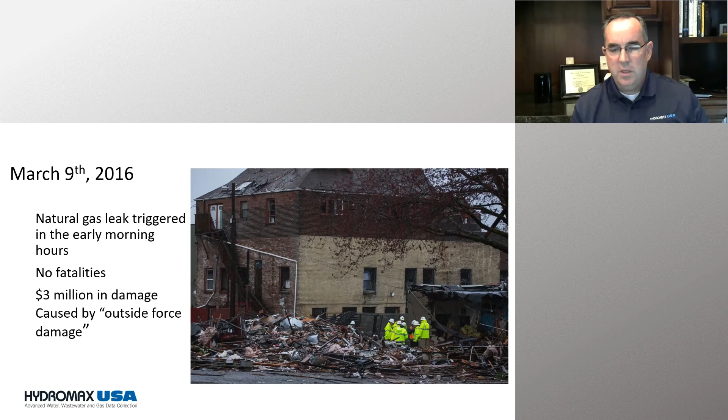For example, if you ever went to a business and saw a gas meter outside with concrete and steel poles around it, every now and then you'll see one where a large vehicle bumped into that concrete pole and knocked it over, and it hasn't been replaced. That makes that meter susceptible to some type of outside force damage, which was the case here. It wasn't because of one of those concrete pylons - it was something else. There was a homeless encampment around this gas infrastructure that caused the problem. Again, no fatalities, not even really any injuries, but a lot of property damage.

So what are the compliance requirements? There are a couple of agencies to be aware of. One is called PHMSA - the Pipeline and Hazardous Materials Safety Administration - and they write the CFR, the Code of Federal Regulations. This regulation, 49 CFR, talks about requirements that any natural gas utility has to meet. Whether you're a large investor-owned utility, a private utility, or a small municipal or even a co-op with 15 gas meters, there are requirements you have to meet for inspection.

You have to proactively go out and look for leaks. It's not enough to wait for a business owner, a resident, or a constituent to call you and have what's known as an odor call. That's not enough. For example, Washington state regulations require that you go out and proactively investigate and look at your infrastructure to make sure that you're not causing any issues.

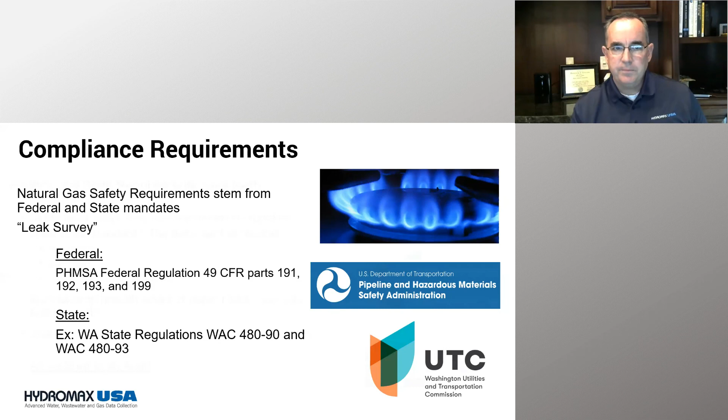And these regulations have teeth in them. You can be fined, a lot, millions and millions of dollars. Besides the damage that has to be repaired, you can just be straight up fined if you're not meeting the requirements. They're very specific, and you need to know what those standards are.

Every gas utility is aware of those standards. For a large utility, there's entire departments dedicated to making sure that those standards are met. So what is that standard? Well, it's broken down into residential areas, business areas, and high occupancy structures is another one.

When we look at the document of record, what is a document of record? Well, for years and years, it's been a paper plat map, and I'm going to show you an example of that here in just a minute. We're going to talk a lot about paper. Because you have these requirements that the utility has to meet, you have to make sure that when asked, you can actually provide those documents. And so there are literally boxes and boxes of paper that have to be rummaged through when that happens.

So you have the obligation to prove that you did the inspection on a certain interval. Residences need to be looked at once every 3 years. Businesses are once a year. If you're a high occupancy structure, which is generally defined as at any point given a day, are there 25 or more people in that area? And if the answer is yes, you can be designated as an HOS, a high occupancy structure. And if you do, then you need to have a leak survey done every 6 months.

In the city of Seattle, when the tunnel boring machine was going underneath Seattle to dig the tunnel that replaced the Alaskan Way Viaduct, it was not every 3 years, or every year, or every 6 months. It was every single day. Prior to, all during, and following that tunnel boring machine working, we did a leak survey over the tunnel boring area every single day. Christmas, your birthday, snowing, rain, Easter, it didn't matter. Every single day, we had to do those investigations.

It's not if, it's just when. And when the auditor comes in, they're going to ask some very specific questions that you have to be able to answer. So during those audits, there's lots of areas that you have to look at.

In general, what you need to do is have someone carrying a methane detection device, something that will sense the presence of natural gas, and walk over the top of where your distribution mains and distribution service lines are. So let's talk about residences. If you live in a neighborhood and enter it, and it leads up to a cul-de-sac, somewhere on that street there will be a distribution main that runs, and off of that main will be a service line going up to each home. So every 3 years, you've got to walk above those to make sure they're not leaking. You've got to go to the actual meter, take a look at it, and make sure it's in functioning order, not leaking. You have to make sure there's no atmospheric corrosion or other kinds of issues.

And so there's lots of obstacles that happen. In this image to the right here, you can see the technician with all his equipment going up and over a fence with a ladder. Cannot get in, which is actually known as a CGI. In some cases, it's a CGA, for 'can't gain access,' but a CGI or CGA means I can't get to the meter.

So what might prevent you from getting to a meter? Well, it could be a lock gate, a fence, or someone stacked plywood over it because they're doing a remodel. It could be because they have a Doberman or some other dog in the backyard and you can't get in there. All kinds of reasons why you can't complete that house.

You have to look at the high occupancy areas and high occupancy structures. You have to look at atmospheric corrosion to see if there's any corrosion on that meter. In a really dry area, it's going to be small. If you're in a high salt content environment, like on a coastal town, it could be really different.

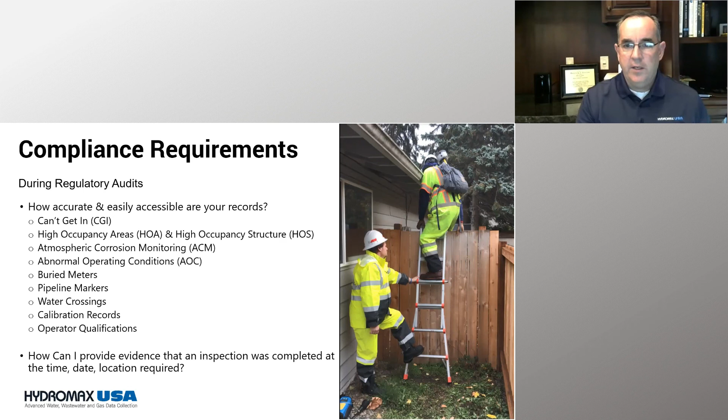So these maps are literally passed back and forth to the field. They're generated by the utility, given to the service provider, in this case Hydromax. We then distribute them out to the world to get the inspection done. And then as the individual walks up this particular street, as they finish that and walk up to the house, they literally pull out a Sharpie highlighter and highlight it, and that is the indication that they're done. This then becomes the document of record that is kept.

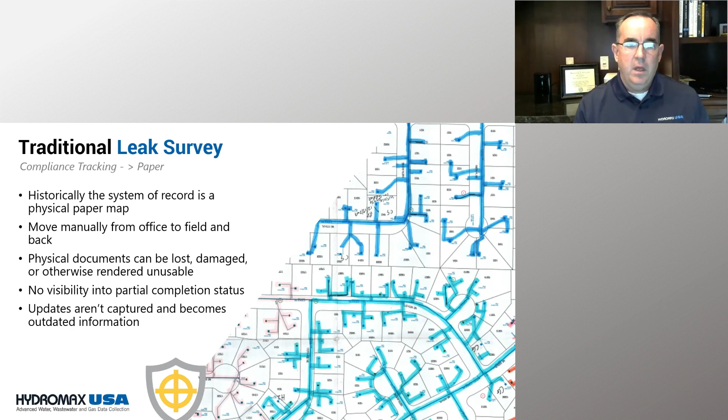So as we look at this, I'm going to quickly go through a couple of slides to talk about some of the difficulties of the traditional leak survey, not the least of which is printing all of that paper.

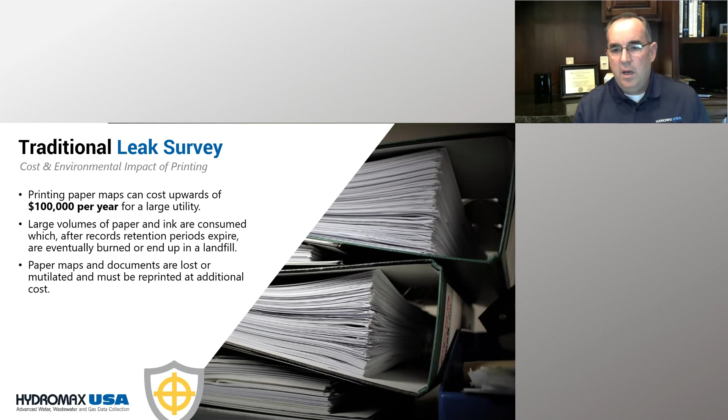You have to print mounds and mounds of paper. $100,000 a year for a large utility is entry level in those maps. And anytime you have something on paper, it can become outdated, it can be lost, it can get rained on.

It can get torn. All kinds of things can happen, and sometimes they have to be reprinted. Once you complete that work, you've got to save it and put that paper somewhere. If you've been inside some of these utilities or municipal buildings, you see rows and rows of storage facilities. And if you run out of space, you've got to take it to a third-party storage facility. All of that takes time and money. And by the way, when the audit comes, you've got to go get that paper to show the auditor when he or she asks.

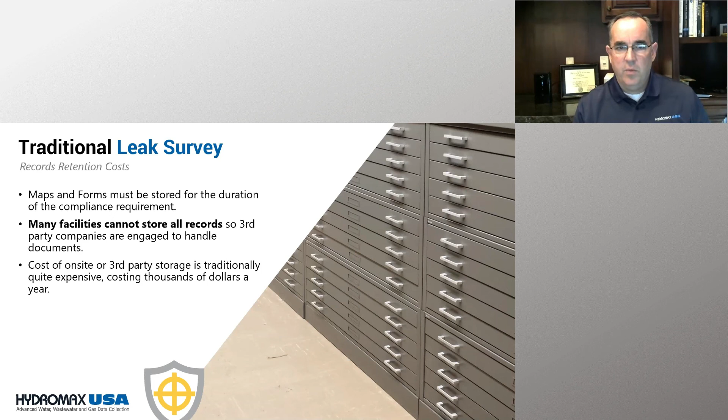This is the other part of that. Your employees, your technicians have been operationally qualified, or OQ'd. So how do we know that they actually walked where they said they walked? They highlighted a piece of paper that said, I walked down Northeast 67th Street, but did they actually do it? A lot of utilities will have a capture-the-flag system where they hide a flag at a random address. If you really went to that address, you'll see the flag. But if you didn't go, you won't see the flag, and your investigation can be invalidated. All kinds of crazy things like that.

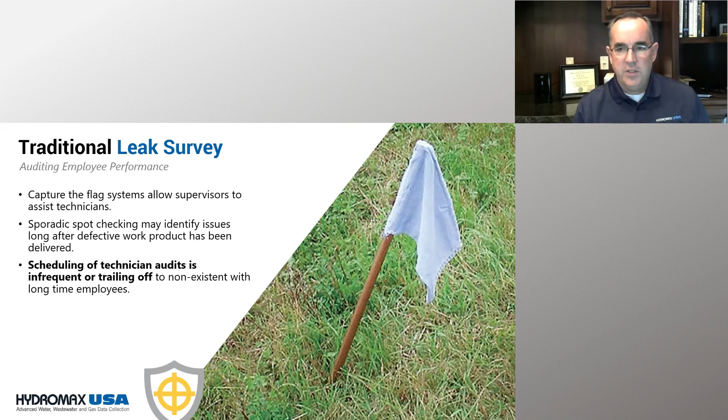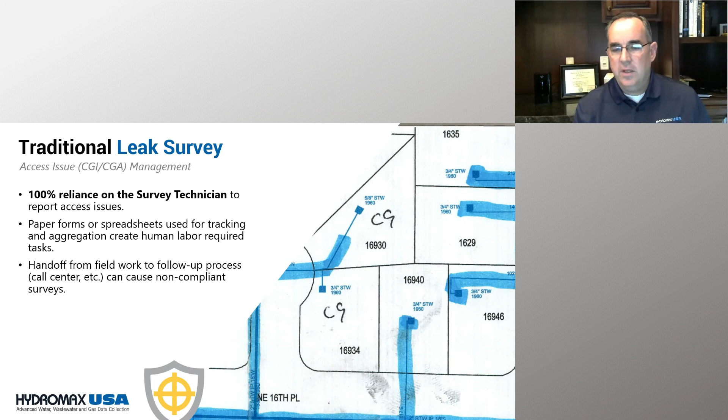And that's it. Then they turn that map in, and someone's got to go back later and figure out, hey, where did we not get that? That leak survey still has to be done, but I can't see it. So the handoff to have that followed up on later is pretty painful off of a paper map.

Falsification of records — I hate to talk about that, but I mentioned it briefly a moment ago. You never want to accuse a technician of that, but the only record that this technician did this address, house number 1641 or house number 16935, is some blue ink on a piece of paper that says they did it. Hopefully they really did it, and hopefully they highlighted it while standing in front of that house. But is it possible they could highlight it sitting in an IHOP? Yeah, actually you could. There's no other evidence, aside from maybe this capture-the-flag process, to prove that you really were there. It's kind of a scary thing that keeps utility owners up at night.

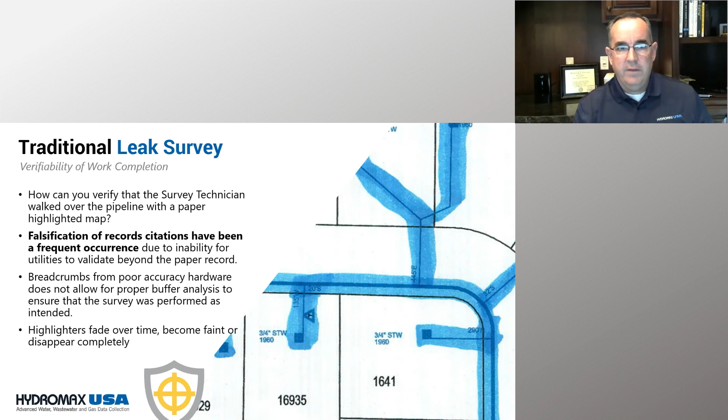Map revision — this is another one. So we have a map that says the meter is on the left side of the house, about halfway back. What if it's not? What if it's on the right side of the house? What if the mapping is just wrong? Well, then the technician has to stop, pull out an 8.5 by 11 piece of paper, fill something out, and say it's not on the left front of the house, it's on the right front, or the right rear, whatever that is. Then that piece of paper has to be turned in, and somebody's got to enter that later and update the mapping. It's a painful process.

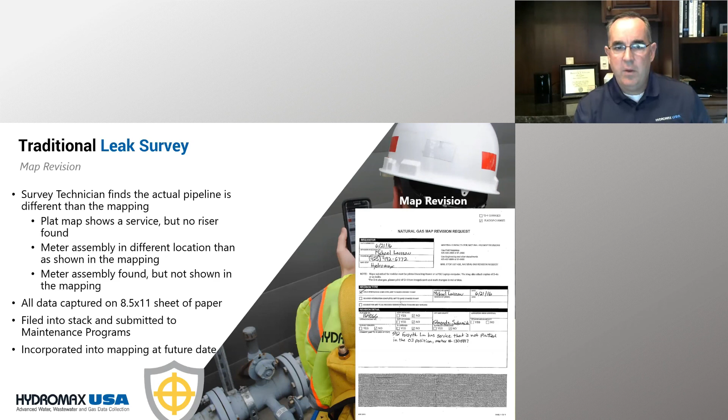Now, this is a GNSS webinar conference, and so I know you guys are getting ahead of me and you've already thought about ways to make this better. Don't get ahead of me — we'll get there, I promise.

Accountability for a true investigation. This is the other thing that keeps utility providers up at night: if a technician using their equipment walks past the leak, they have a device.

I've got a better picture over here in a minute, but that device will alarm to say, hey, I'm sniffing. It's literally got a vacuum pump in it that passes air through a sensor. And if it senses the presence of methane or natural gas, it alarms and tells you not just that something's there, but how much.

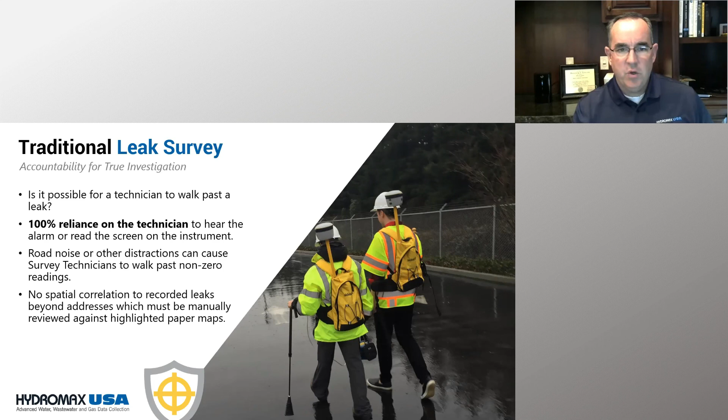Well, if that technician is listening to something on Spotify, which they're not supposed to do, but if they do, what if they walk past a leak? What happens? We'll talk a little bit more about that. And obviously, there's no spatial correlation when you record those leaks if they're all on paper.

Okay, so how can we improve a traditional leak survey? Well, again, we've got this huge stack of paper maps. We've got all of these colored markers in stacks everywhere. We've got people driving around shuttling pieces of paper back and forth in and out of the territory.

And even after all that work, even though this is the document of record that says you really did it, did you really do it? I hope so. Was public safety improved by this process? I hope so. But all of this manually collected data, how do we consume all that?

Well, so we're now going to shift and talk a little bit more, as Gavin put it, where the rubber meets the road, on how we employ some GNSS solutions to help this gas utility.

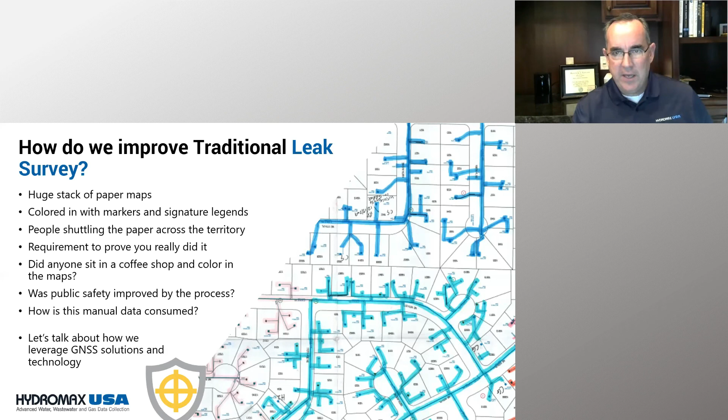So first of all, the people on this call are probably really used to this, but let's talk about how this is used for utilities. Is GPS or GNSS solution widely used on these outdoor fixed assets by gas utilities? And the answer, unfortunately, is not really. Very few are really embracing this technology.

So I told you there's lots of rules from PHMSA and state regulatory agencies. Is GPS collected data required for leak survey? It's not. You do not have to do it that way. You do have to prove you did it, but at the moment, that paper record is all you have to have.

Will it be important in the future? Well, that's a question, and I would say likely. I think the writing's on the wall. PHMSA released an update recently to their CFR 192 about pipeline safety, and there's now more language about location. Now, they're still not requiring that location be completed through the use of any GPS or GNSS solution, not to mention high accuracy, but we're moving more into this tracking and traceability information that includes location.

In the state of Washington, just this year, back in February, the state legislation passed a new law that went into effect in June of this year that, in summary, says to encourage a safer and more efficient natural gas transmission distribution system. In section 3.3.a, the location of each leak is becoming more important.

Now again, they did mention GPS. I actually read this House bill, believe it or not, and they talk about GPS being an option, but because of the expense and all that kind of stuff, it's not yet required, but the writing is definitely on the wall.

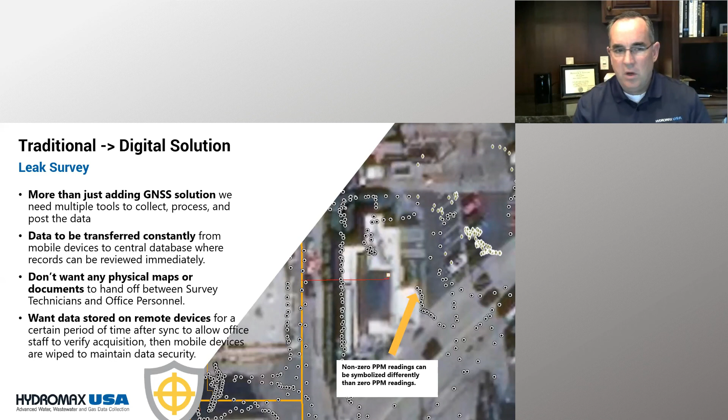We want to make sure that we have data transfer. We want to get rid of these physical plat maps for all the reasons I stated, but not to mention, during the height of the COVID problem, we were actually quarantining the actual pieces of paper as we were getting guidance from the CDC and other places about where this virus could live. As people physically are getting together and passing off pieces of paper, you create this opportunity for contact. And so in a digital system, all of that goes away. So anyway, let's keep going.

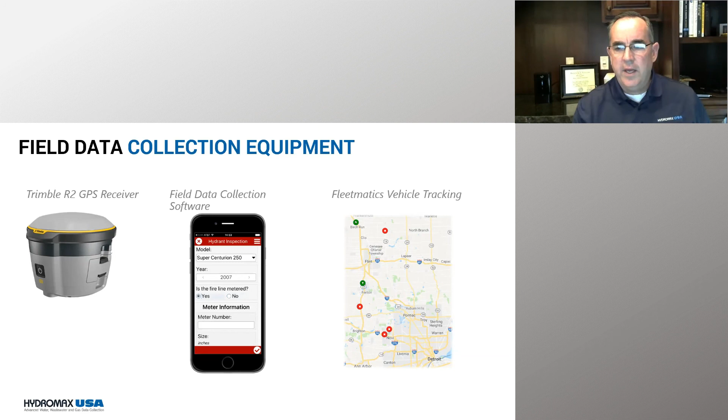For field data collection, what we have standardized on is we use a Trimble R2 GPS receiver. We have many of them. We use smartphones for data collection, either Android or Apple, but most of our stuff are Samsung Android devices. We are a business partner with Esri, so we use a lot of Esri software. This one is running Survey 123. We use Fleetmatics to track our vehicles, so at any given time we know where all of our vehicles are.

For the actual sensors, we have a variety that we use. The Heath DPIR is the one we probably have the most of. That's the blue sensor I was showing in the other picture. It has a vacuum pump inside that pulls ambient air in and tests it. The Sensit PMD is the same. The Pergam down on the bottom is a laser, and as the laser passes through molecules of natural gas, it knows what's there. There's some vehicle mounted, there's drone mounted, there's all kinds of ways that we can do that. So that's some of the equipment that we use.

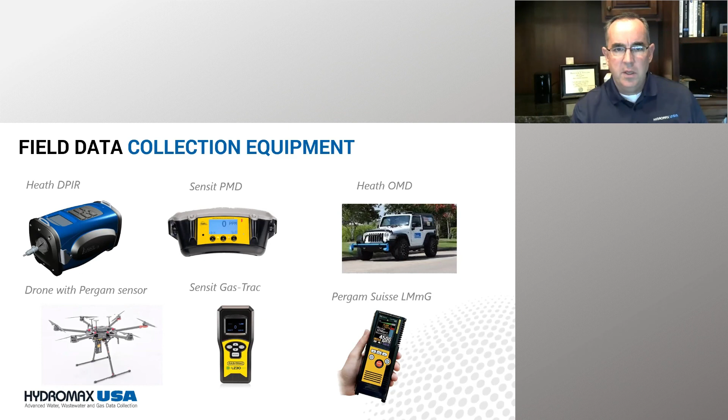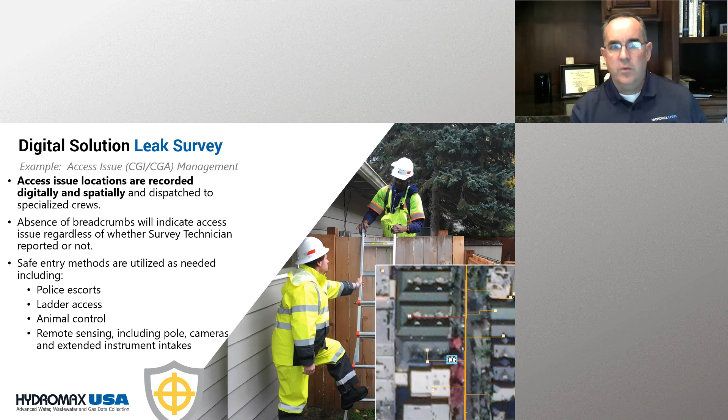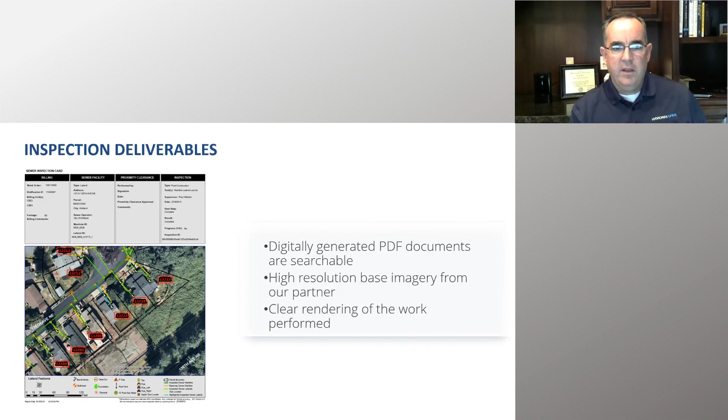So let me go through these really quick so I can get to the end. When we do a report, we can use high resolution imagery to show where the work was done. This one's a cross-bore project, not a leak survey project. Instead of having that 8.5 by 11 piece of paper we use in an arts and crafts project to draw a picture, now we have high resolution aerial imagery. We have a lot of data in there.

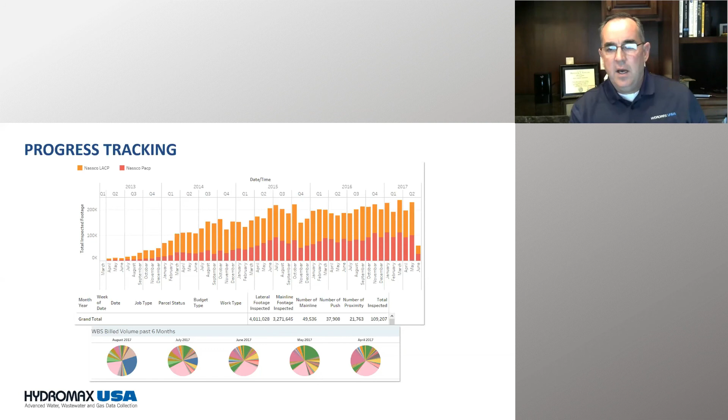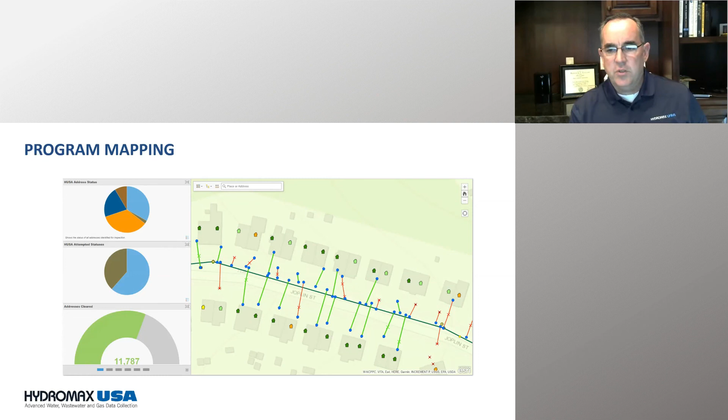And now I have dashboards, right? I can start looking, this particular tool is called Tableau. We use Tableau to look at progress of how much work is done. If I have just part of a map, I can still see that data. I can do actual mapping. Again, this is a cross-bore project where sewer lines are being scoped to see if there's any intersection with gas utilities. I can see addresses were cleared. I have all this dashboard information, which is becoming more and more popular.

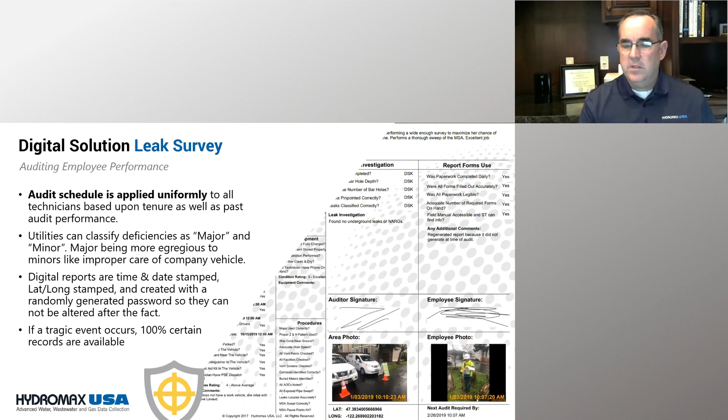This is an audit for an employee. If some type of tragic event happened and the regulatory agency came back and said, hey, you said that this employee did the inspection, I want to see the training records, well now they're all here. You don't have to try to find some sign-in sheet from a meeting you had six months ago. All the data is there.

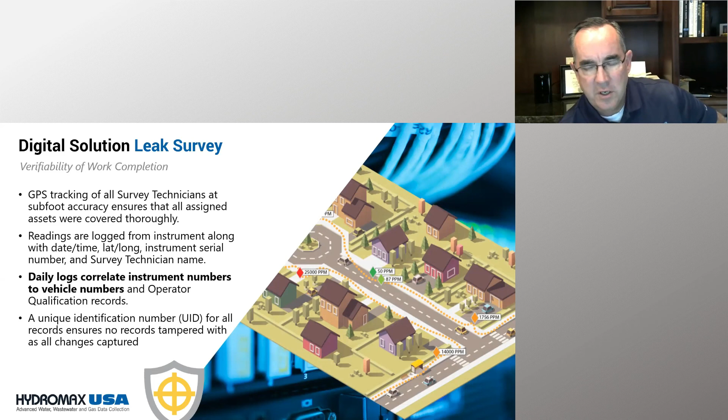And so I want to talk now a little bit about how we collect what's called breadcrumbs. Similar to the previous, I listened to the last part of the previous presentation. Breadcrumbs, we take a point every 1 second as the employees walk, and then we have a separate point feature for every meter investigation that we do.

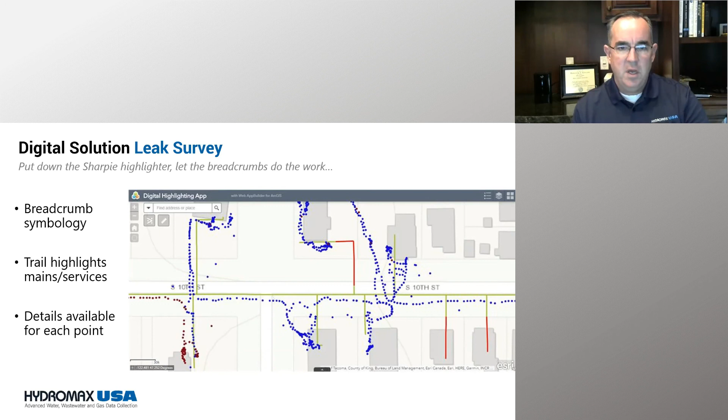And what that does is now we can do digital highlighting, so we don't need that Sharpie highlighter anymore. We can use the breadcrumbs from the person, the technician who's just walking. We can write rules such that if you see on the left top of this image, that green service line up to that house, those breadcrumb dots are within a tolerance prescribed by the utility, and if they are, then no more pulling out a paper plat map or anything to highlight it. All those dots line up. It's not a line feature, it's a section of point features, but the collection of them make up the highlighting, so you can see that they're done.

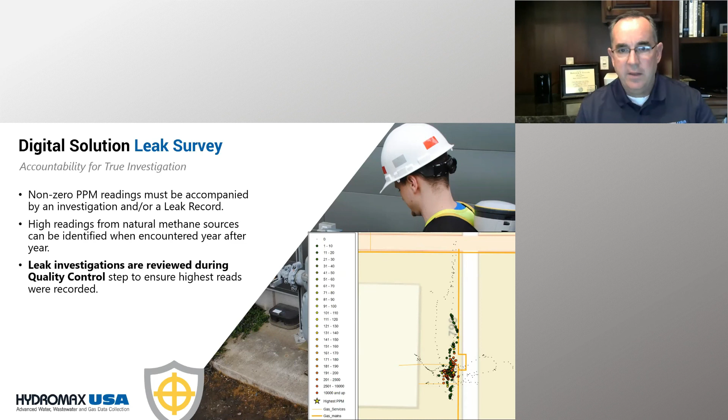The other issue I talked about earlier is what happens if a technician walks past a leak. On paper, if the technician isn't doing their job and walks over a leak, that data is just gone forever, which is not the case here. Every breadcrumb you drop is connected to the methane device, so we know the parts per million reading for every single breadcrumb. We collect millions of breadcrumbs every week, each with a ppm rating, so we know exactly what work was done. If there's no leak investigation associated with a high ppm reading, it's bad that the technician missed it, but at least it's not gone forever. We can go back and check it out.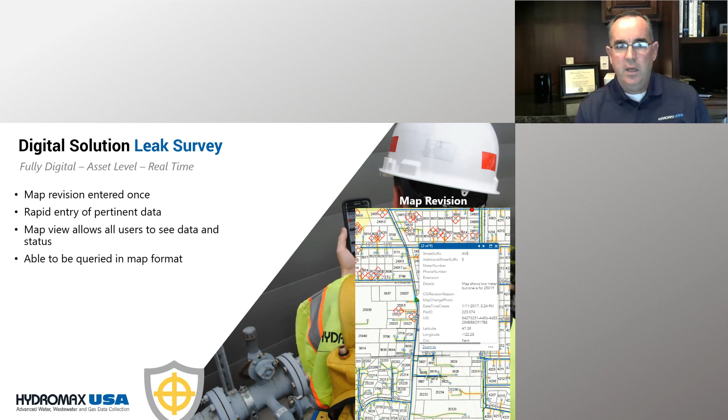Map revisions work the same way. We can communicate electronically the changes that are required for the map.

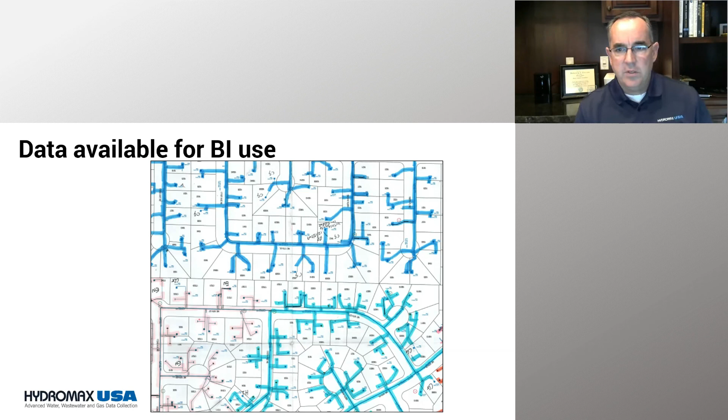This is the last section: data available for business intelligence use. This is that paper plat map we saw before, and we want to replace it with this. We now have a live map. This is a static image here, but if you were looking at a computer instead of this presentation, it's a live map with all the data. You can see all these initials, most of them FW for Frank Williams, the technician who did all the leak investigation.

Because it's GIS, I have a layer list on the right, and I can turn on and off whatever I want to look at. If I'm investigating this residential neighborhood, I can turn on all the breadcrumbs and see exactly where that technician walked. I can see if they missed anything, like an entire house, or if they couldn't get in, because the breadcrumbs simply won't be there. So I can turn breadcrumbs on and off.

Let's pick one of these at random. If I pick this investigation point feature, from when the technician was standing in front of the meter, I can click on it, and while the technician was there it took a picture of the meter and got some data about it. They take a picture of the entire meter set assembly, then a close-up of the serial number, so I don't have to worry about whether I misread the serial number—I can actually have a picture of it. Then there's a picture the utility asks for, of the worst corrosion visible on that meter, which can be reviewed separately by the corrosion prevention department.

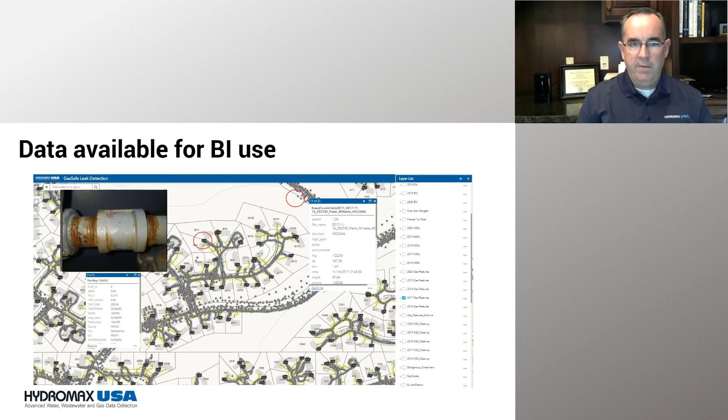If I click on a breadcrumb, I can see information about it: the time and date it happened, the lat-long of where it was, and the parts per million reading—whether it was a zero or some other number. All of this becomes data-rich for the utility. Instead of just a two-dimensional piece of paper, I now have all this information at my fingertips to use however and whenever I need it.

In the interest of time I won't go through all this, but these audits, which are not optional, are going to happen, and you have all this information available to you. The data is collected—you don't have to rummage through crazy filing cabinets to find everything. It's all there and ready to go.

So with that, I'm at the end, and I'm going to go out of presentation mode so I can actually see the camera.

Thanks, Mark, that was a great overview. This was the rubber-meets-the-road example after the last presentation.

Question: I see your crews around town with the receiver pole in the backpack. Yep. So where you're standing, every shot's going to be within a meter, but right under that pole in the backpack, it's decimeter accuracy, probably even tighter.

Do they ever turn around and put the pole over the water or gas meter to try to get a better shot, or is that not necessary? Yeah, I wish they would. They have to be looking at the meter to answer the data dictionary questions in the survey form, so they need to see that. But we do ask them as part of training to get as close as they can and find the best position possible. We realize there's some error introduced by it being on the body, and not everyone completely knows how the whole system works. Every now and then I'll see a slouchy backpack where the antenna is kind of wonky, and we've got to correct that. But we want them to get the best position possible.